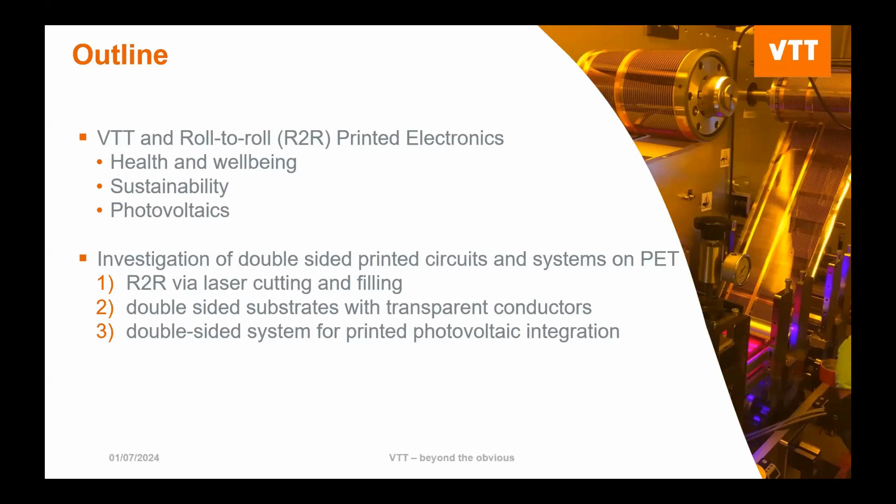At VTT, we have three business areas: carbon neutral solutions, digital technologies, and sustainable products and materials. The printed electronics domain falls under digital technologies.

What I was saying earlier is that there's a bridge between academia and industry that VTT fills. A lot of the talks we saw earlier today are really academic, beautiful research with lower TRL. And then, what to do next?

How do we bring those ideas that we heard about today to market? We need to scale them up, productize them, and develop good business models. That's where VTT fits in.

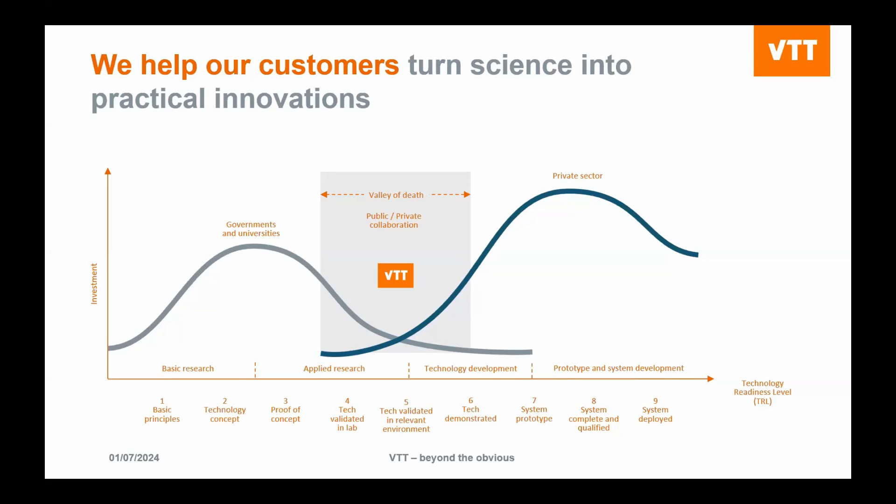At VTT we do a lot of work with several different pilot lines. We're going to look at a few in detail that relate to the particular paper I'm discussing today.

In general, we have all the capabilities for printing on flexible and stretchable substrates, both in sheet and roll-to-roll form. We also do assembly and interconnection of components, as well as post-processing.

We do everything from a full converting line with robotic arms to injection overmolding for something called structural electronics. There was a spin-off company called TactoTek, a spin-off from VTT, also up in Oulu.

They work a lot, for instance, in the automotive industry, reducing material use in a lot of automotive electronics. What you do is take your hybrid system — traditional electronics on a printed backplane — and then...

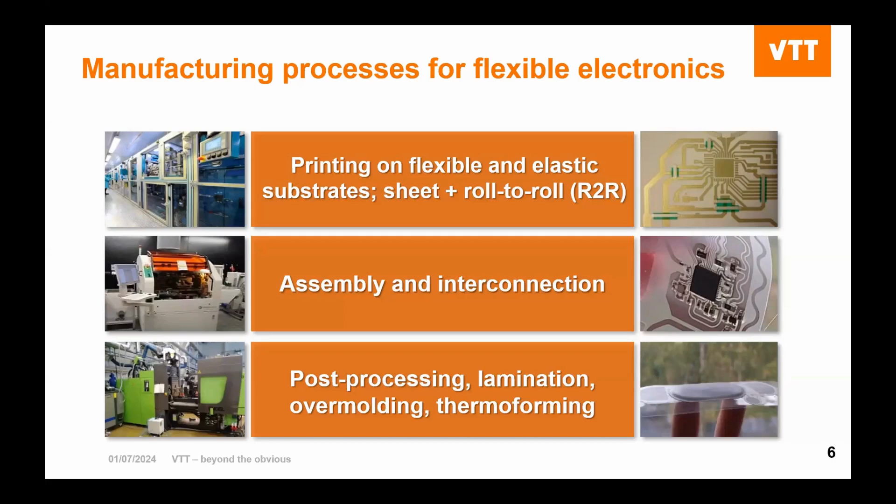you overmold it in plastic to give it a structural element. So you're really reducing the material use, and they're doing a beautiful job there.

So where did they come from, and why did they start there? That's just one use case, for example. At VTT, we really put a lot of emphasis on this development back in the late 1990s.

There was heavy investment throughout the 2000s, and about 10 years ago, there was another big investment for the larger roll-to-roll lines at VTT.

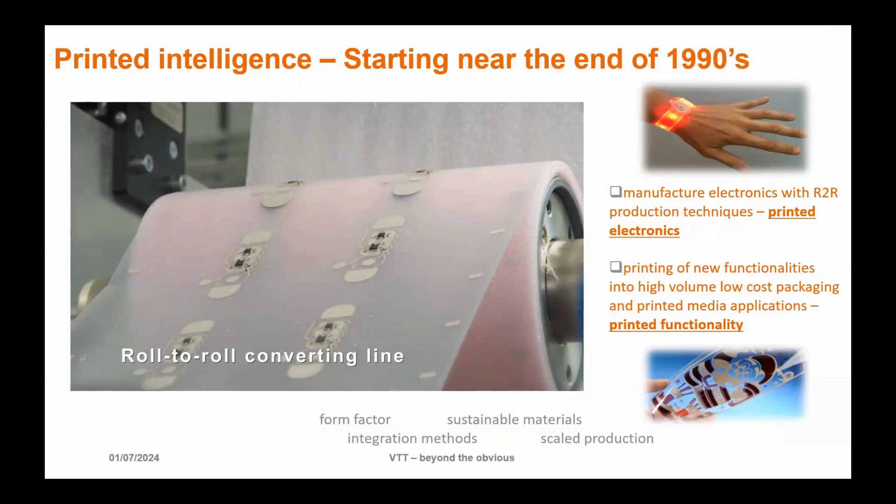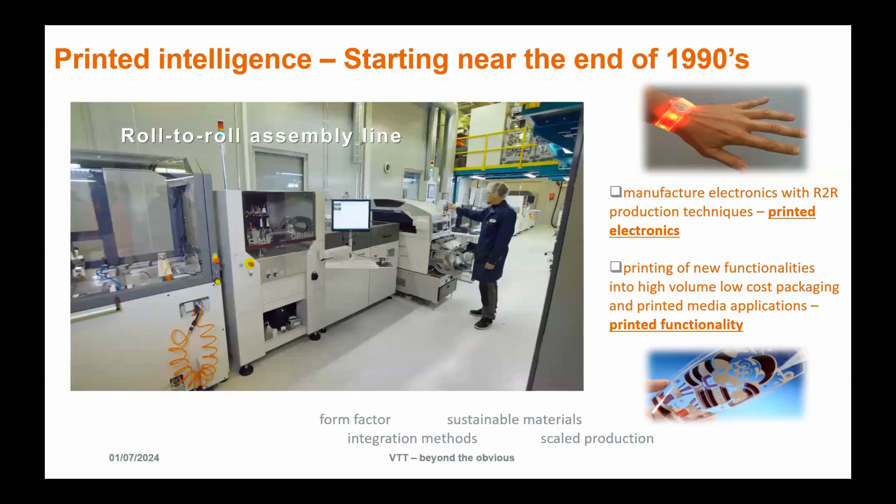I'll speak a little about one use case: some of the wearable electronic development we do. We go from design to manufacturing, including pilot manufacturing — we're talking thousands of units, even tens of thousands of units.

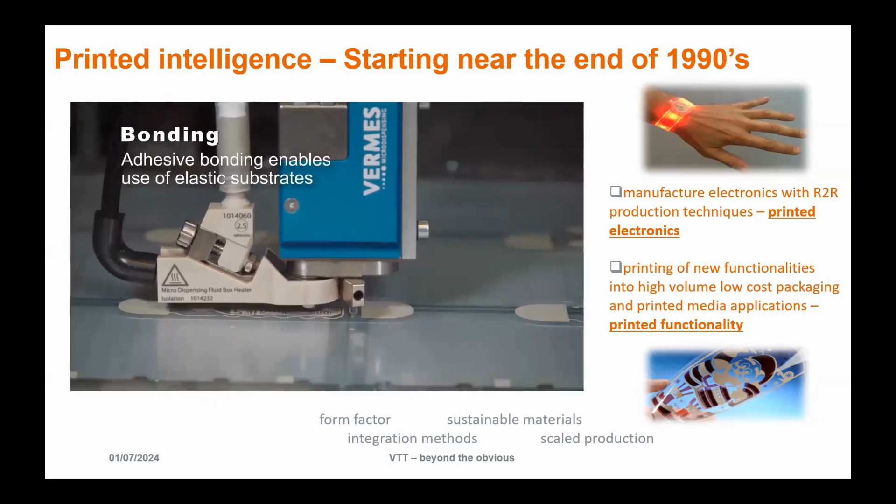This is for when companies want to reduce their risk. It's not too much — it's one component of silver or urethane, and then you can place...

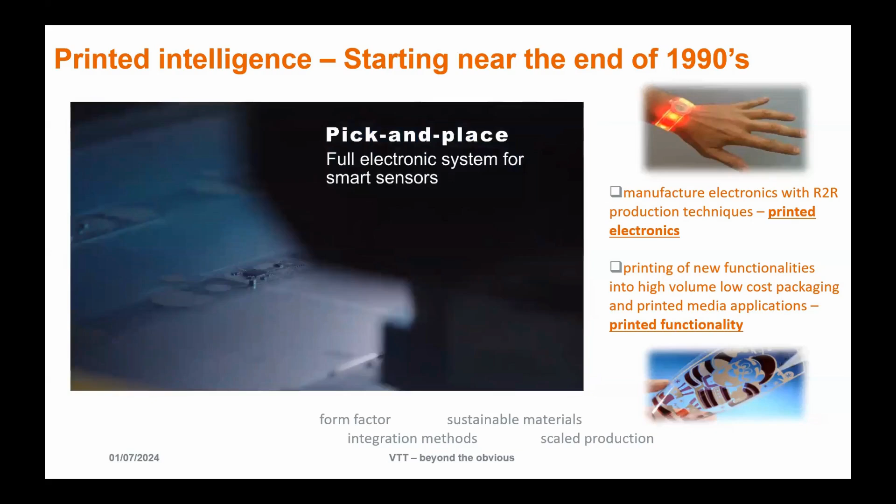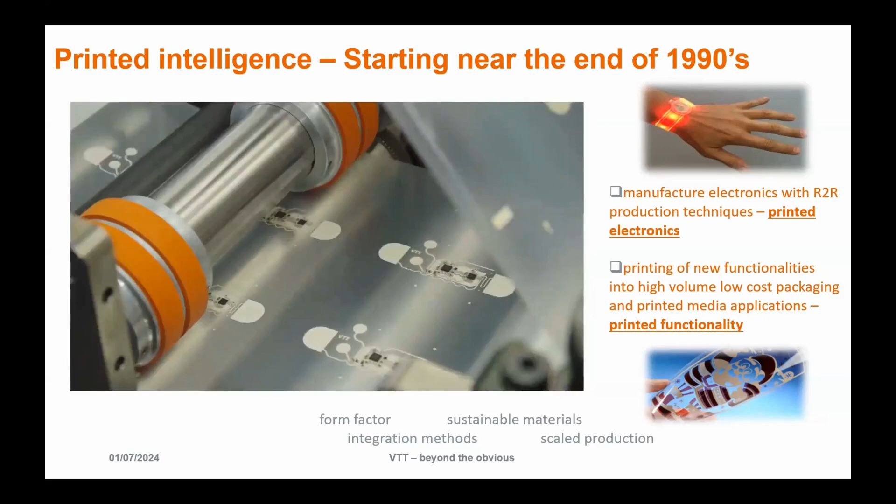through the functionality of the device, you're not just relying on digital electronics. And then you propose it to them.

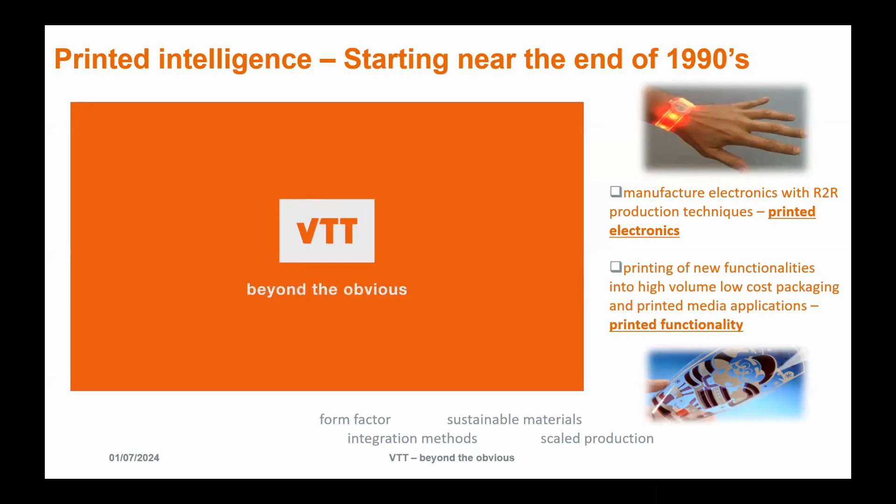Some people might be saying, well, why do you want biodegradable substrates? It's just going to deteriorate, don't you want to increase the lifetime? Well, in most cases you do, but sometimes, for instance in agro electronics, where you might put the electronics in the environment with plants to monitor food crops, you don't want to have to go pick up all the electronics later on. So one idea is that maybe you can develop more environmentally friendly devices that can be absorbed into the dirt. Of course, you don't want to use -- obviously you're pointing out there's ICs there, you don't want to leave those around. So we're not quite there yet, but on the way, I think.

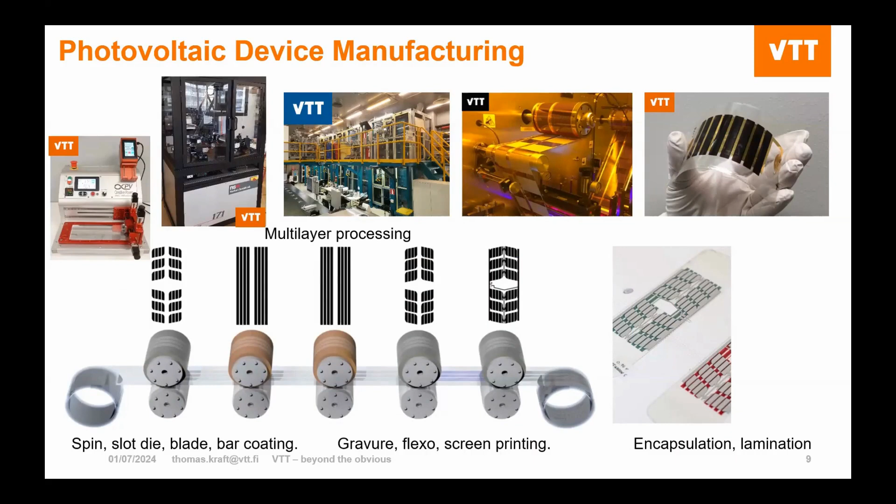Now my background is with photovoltaic manufacturing, so what we do here is we're printing multiple layered devices. Often we'll have the conductive transparent oxide, and then an electron transport layer and an active layer, then maybe a hole transport layer, followed by your back contact electrode.

For integration, this is where we get more into the depth of the case study that I want to discuss today, where we have these different laser options to either post-process and access the devices if they've been encapsulated, or in this case you can use a CO2 laser. Here's two examples from work that we published relatively recently.

You can use these double-sided vias for, let's say, doing those health monitoring patches. You can have the electrode on one side, and on the other side of the substrate you have your electronics. Here's a paper I published with Matti Mäntysalo.

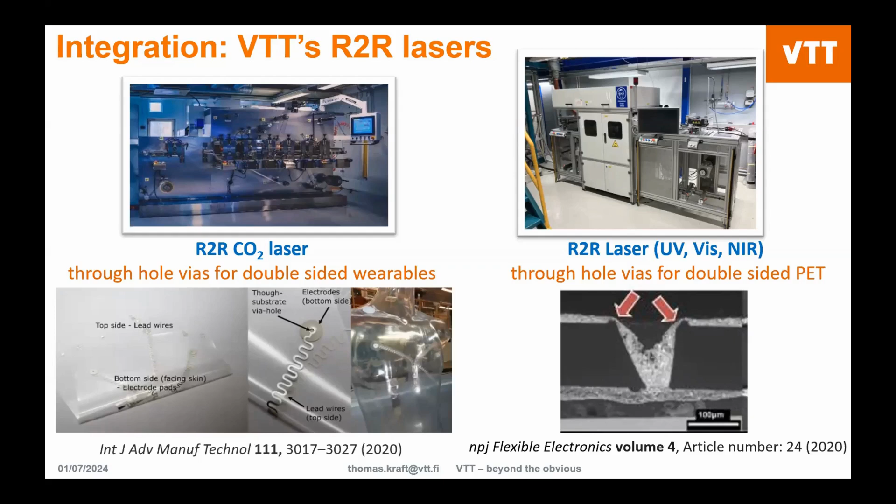This was for sheet-based processing. We used a UV laser on our roll-to-roll lasering line, and we just did sheet-based screen printing. But then the question is how to go to volume manufacturing. This is where it comes a little bit more complicated, because there are many steps to get to this double-sided system, and this is just for the double-sided printed silver, or the FPC.

So the first step we always do when we're doing roll-to-roll processing is the thermal pretreatment. Even though we get our substrates, for instance this Melinex ST506 that's heat stabilized, when you're putting it under tension on a printing line, around 80 newtons of tension, and it goes through the thermal ovens, there's a small percentage of stretching. But one good thing is once you do a thermal pretreatment at that particular condition, if that's the most extreme condition that substrate's going to see in the roll-to-roll process, it's not going to stretch any further after that. That's something we proved in a paper I published recently in the International Journal of Advanced Manufacturing.

So after that's done, if you have ITO on your substrate, you'll want to do ITO etching. We do wet etching at VTT. And then when we want to do these vias for the double-sided systems, we use our roll-to-roll CO2 laser line, and we also add a PET liner. This is done on this converting line up in Oulu, and this is our CO2 laser right here.

The reason why you want to add the liner is so that you don't get any fouling or ink seepage through the via holes. Of course, when you're doing sheet-based processing, you don't really think about this, but when you're using roll-to-roll processes, it's very important to consider these.

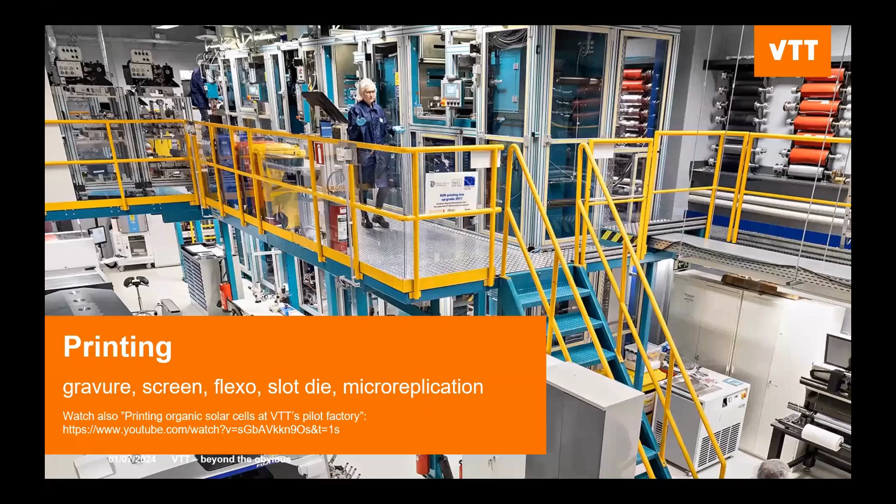So after you add the liner, then you can go to your printing line. This is one of our larger roll-to-roll printing lines. Here you can see the printing unit would be on this far end, and then we have these large ovens that are spaced out sequentially. The reason why it's two stories is so that we can reduce basically the surface area of the device, if not it would be outside the building.

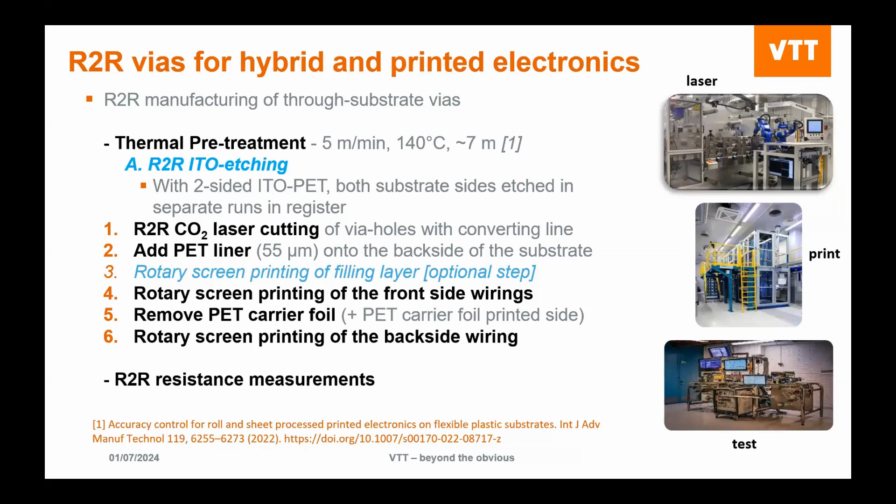After printing on one side, you can remove the carrier foil back on the converting line. You can add another carrier foil on the opposite side where you just printed, and then print your second layer of wiring. After that, you can go to our roll-to-roll characterization line.

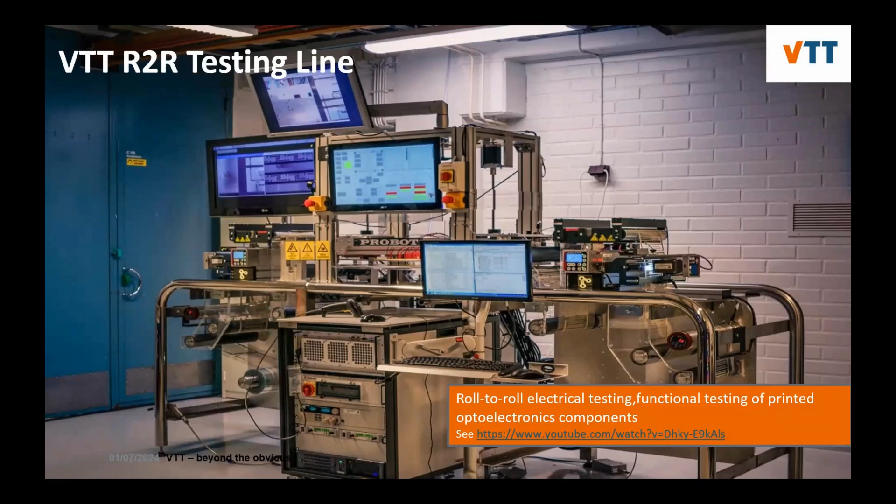This is where we can do hundreds of meters of inline characterization. This is a stop-and-go process where we have a flatbed of pins to measure the resistance of the particular metal that we've printed. In this particular use case, we did a daisy chain structure.

The main message here I want to give you is that depending on the screen parameters, the wet thickness of the ink, and if you fill or not the via hole, it'll have a different effect on your yield.

So for instance, what does unfilled mean? Unfilled is without the additional via filling step. So you're just printing the circuitry on side A and side B, and then the via filling will just be from the printed traces, so it'll just flow into the via.

But if you want, you can have an additional via filling step with a thicker screen. In this case, the filling layer was 125 microns to ensure that you're getting nice filling of the via.

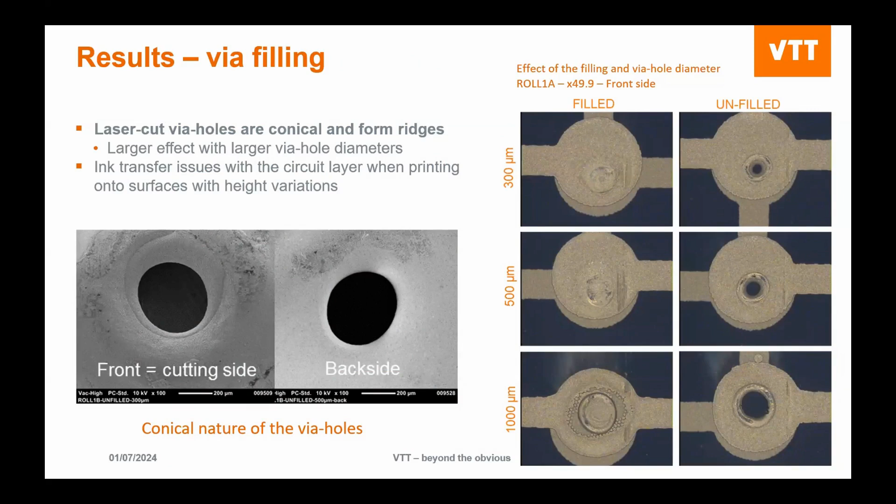So here's some examples of what the via filling process looks like. You can see just from the diameter of the laser cut vias, you also have a conical structure of the via, and this was also observed in the cross sections.

When we're looking at ITO PET, so this is indium tin oxide, we did an investigation with just a single layer of the ITO. On the back side you'll have the ITO, and on the front side you have your daisy chain by the printed silver.

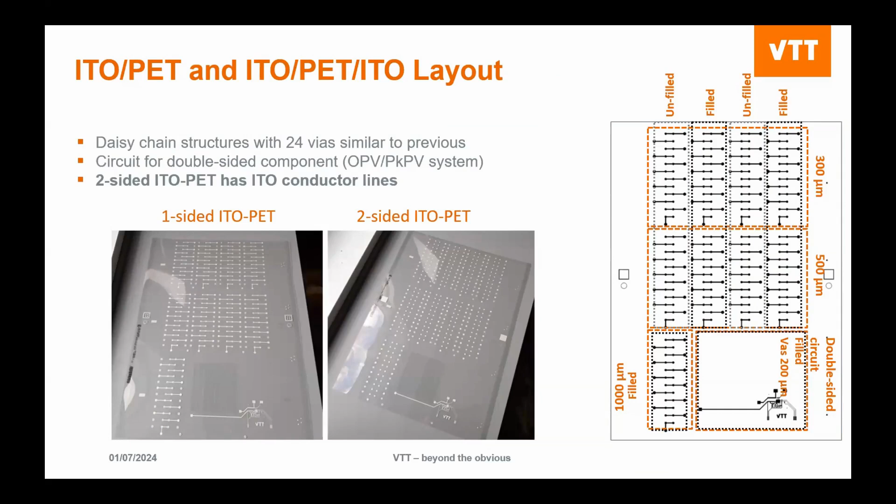But here we also have the daisy chain on a double-sided ITO, so you can see that the vias were filled with silver, but the interconnections between the via holes is the ITO, so that's why it looks transparent.

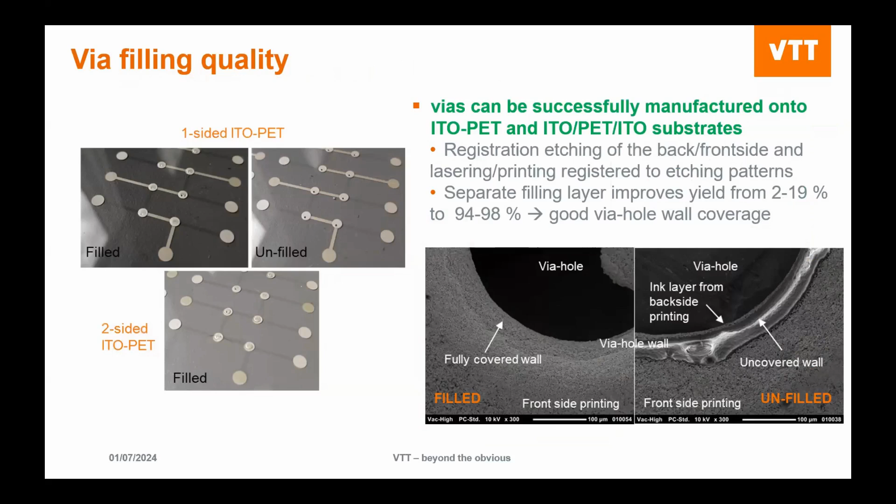You can see a closer view of this. Basically, in the case of the ITO, the via filling step was quite important, so that you're able to get really nice contact between that thin oxide layer and the via hole.

Now for the printed PV module, we took the ITO substrates with the vias and the metal traces that were made in the previous runs, and we used that as an energy module platform. So you can see your ITO here, your etched ITO, and then we would have the energy management IC.

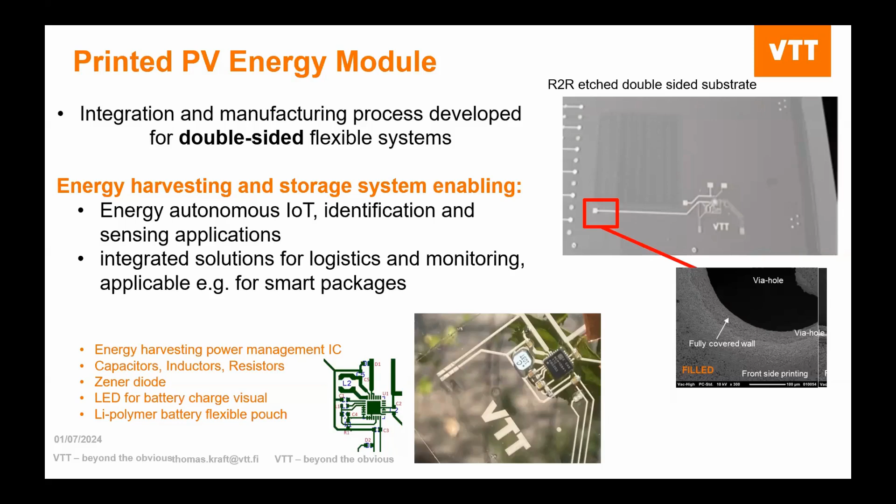We also have an LED to show that the battery is being charged, and we also place a battery on this. So it's a multi-use platform. In our case, we tested it both with organic photovoltaics and perovskite photovoltaics.

With the OPV, you can see we used a P3HT-based active layer with both PCBM and ICBA. These are different fullerene derivatives, if you're not familiar.

And then for the perovskite, this is quite a nice work. This is a flexible perovskite, and we actually won an award two years ago at the Munich LOPEC conference. It won the best demo award for this particular field.

And of course, we can go into more detail if you're interested. But the point is just to show you the use case: here you have your battery and your hybrid electronics, and then on the back side is your OPV. And of course, you might be wondering, well, this isn't the product, but it's to show the use case of how this type of processing can be used.

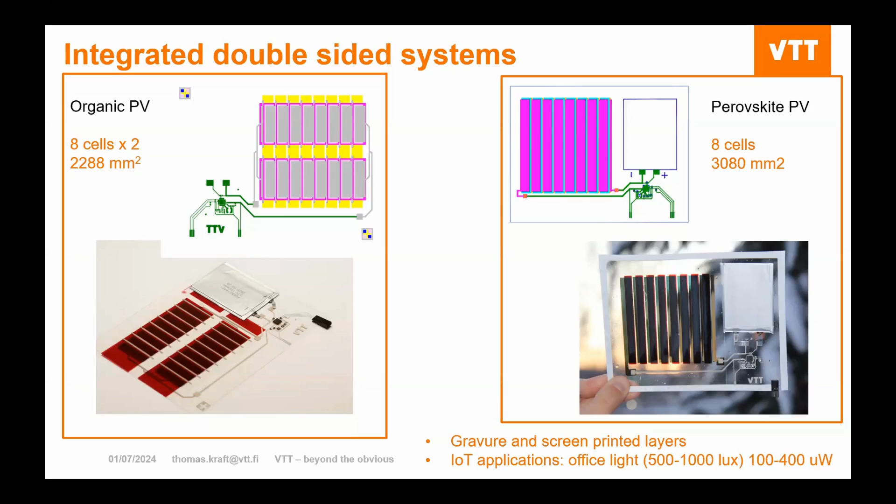So I think it was a nice investigation. We did quite a lot more runs that I didn't share with you, looking at different screen types and ink types and things like this. But of course, that's some things that we keep internal at VTT.

But I think there's a lot of future in this type of upscaling processes that I'm happy to share with you. I think there's a lot of potential also for these double-sided systems and to upscale with this particular approach.